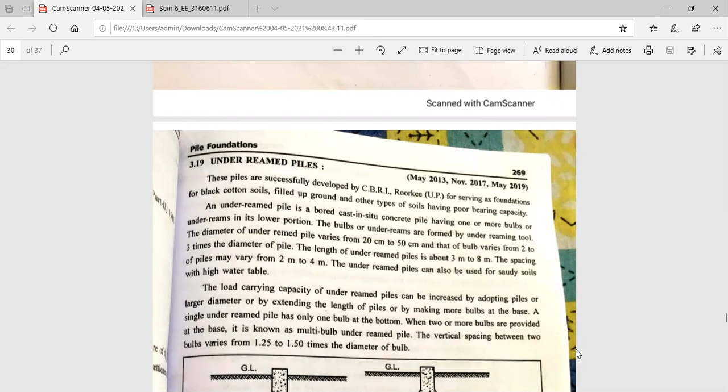Talking about under-reamed piles, these piles were successfully developed by CBRI Roorkee for serving as a foundation for black cotton soils, filled up ground, and other types of soil having poor bearing capacity.

This under-reamed pile is a bored cast-in-situ concrete pile having one or more bulbs or under-reams in its lower portion. The bulbs or under-reams are formed by an under-reaming tool.

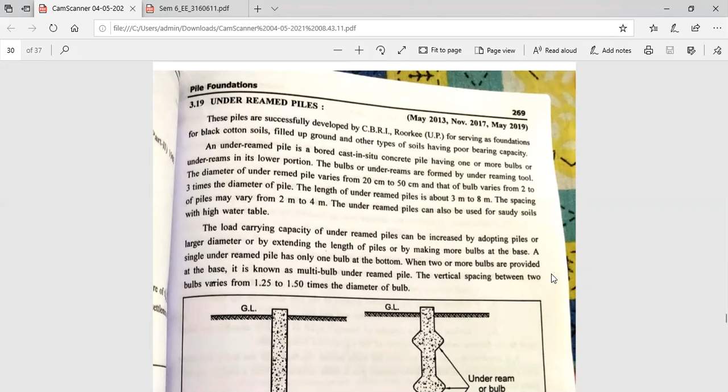The diameter of under-reamed pile varies from 20 centimeter to 50 centimeter, and the bulb varies from 2 to 3 times the diameter of the pile. The length of under-reamed pile is about 3 to 8 meter. The spacing of piles varies from 2 to 4 meter.

Under-reamed piles can also be used for sandy soils with a high water table.

The load carrying capacity of under-reamed piles can be increased by adopting piles of larger diameter, or by extending the length of piles, by making more bulbs at the base.

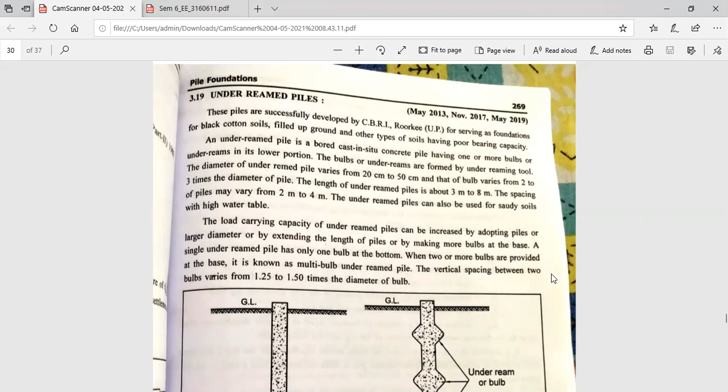A single under-reamed pile has only one bulb at the bottom. When two or more bulbs are provided at the base, it is known as a multi-bulb under-reamed pile. The vertical spacing between two bulbs varies from 1.25 to 1.50 times the diameter of the bulb.

So here the first figure is indicated as a single bulb cast-in-situ pile, and the second one is a multi-bulb type. In this case, there are more than one bulbs given, right?

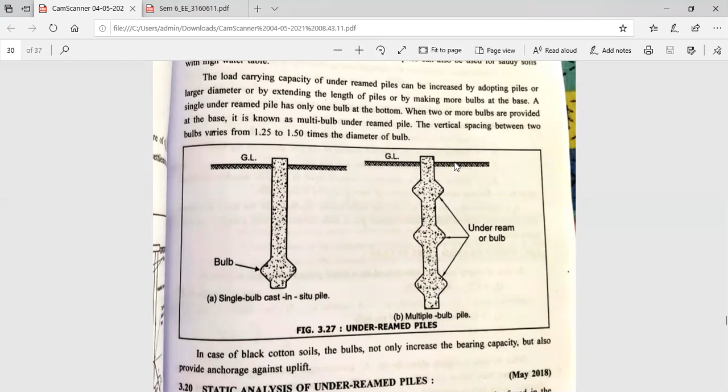It is provided below the ground level, that's why it's called under-ream or bulb. In case of black cotton soils, the bulbs not only increase the bearing capacity but also provide anchor against the uplift, right?

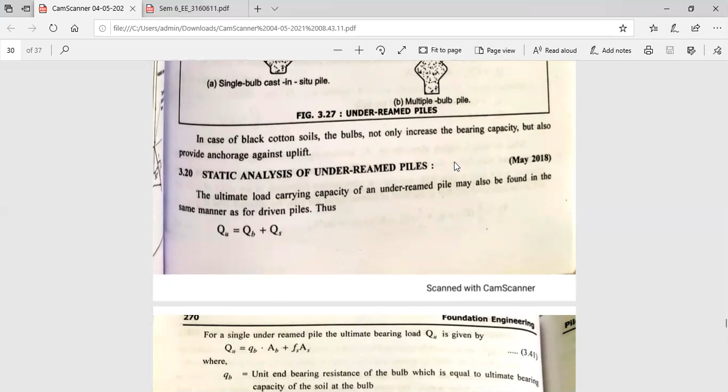So, static analysis for this under-reamed pile. The ultimate load carrying capacity of under-reamed piles may also be found in the same manner as for driven piles, which is QU equal to QB plus QS.

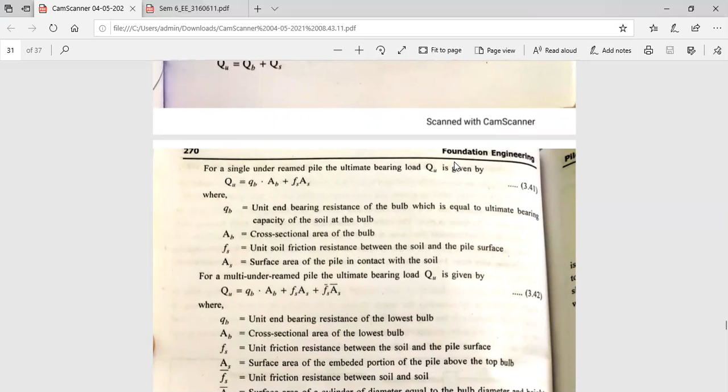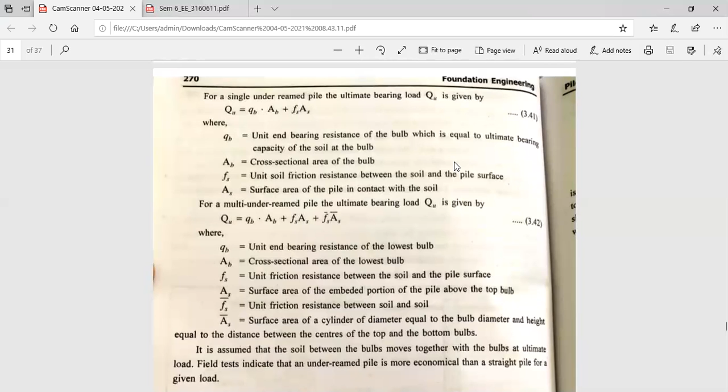So for single under-reamed piles, the ultimate bearing load QU is given by QU equal to QB into AB plus FS into AS. Small qb is equal to unit end bearing resistance of the bulb, which is equal to the ultimate bearing capacity of the soil at the bulb. AB is equal to cross-sectional area of bulb. FS is equal to unit soil friction resistance between the soil and the pile surface. AS is equal to surface area of the pile in contact with the soil.

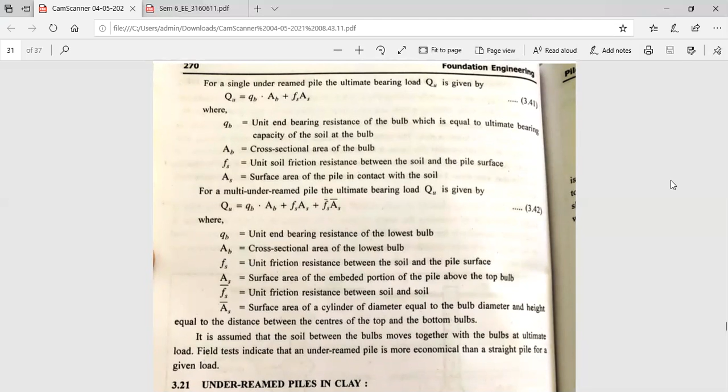And the second case is for multi under-reamed pile, for the ultimate bearing load, which is QU. So the equation is Q equal to small qb into AB plus FS AS plus FS-bar AS-bar. Here small qb is equal to unit end bearing resistance of the lowest bulb. AB is equal to cross-sectional area of the lowest bulb. FS is equal to unit friction resistance between the soil and the pile surface.

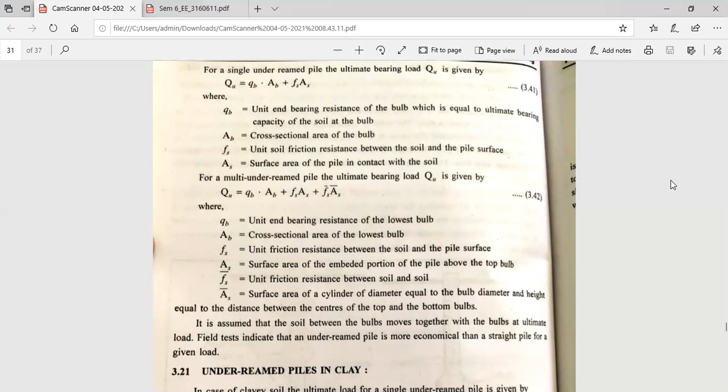AS is equal to surface area of embedded portion of the pile above the top bulb. FS-bar is equal to unit friction resistance between soil and soil. AS-bar is equal to surface area of a cylinder of diameter equal to the bulb diameter, and the height, which is equal to the distance between the center of the top and bottom bulbs.

It is assumed that the soil between the bulbs moves together with the bulb at ultimate load. Field tests indicate that the under-reamed pile is more economical than a straight pile for a given load.

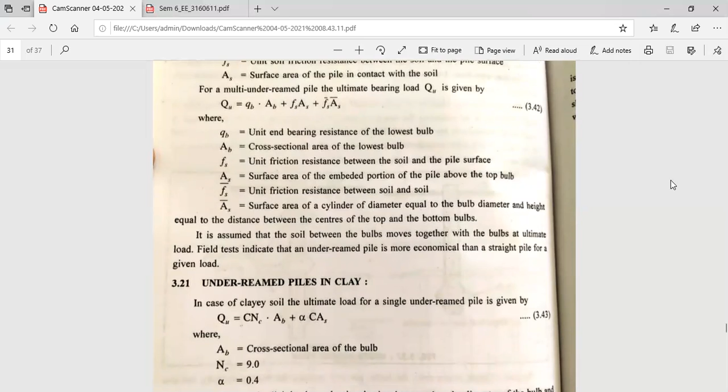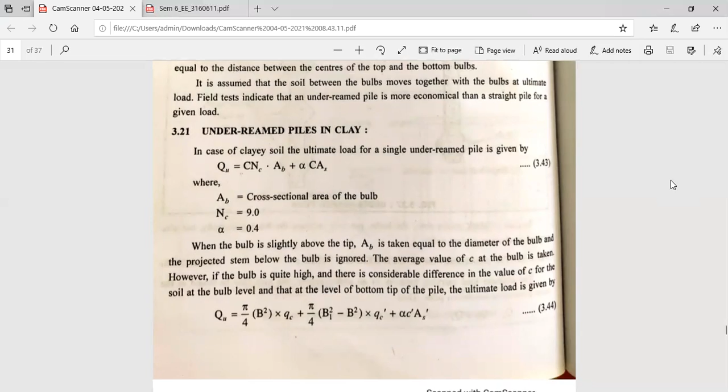Under-reamed piles in clay: in case of clay soils, the ultimate load for a single under-reamed pile is given by QU equal to C*NC*AB plus alpha*C*AS. Here AB is equal to cross-sectional area of bulb, NC is equal to 9, and alpha is equal to 0.4. When the bulb is slightly above the tip, AB is taken equal to the diameter of the bulb, and the projected stem below the bulb is ignored. So the average value of C at the bulb is taken.

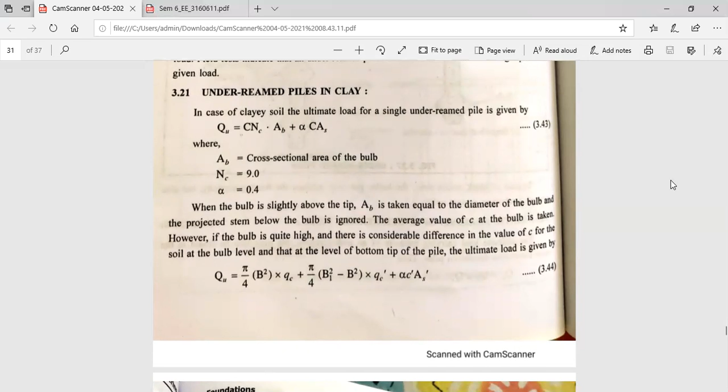However, if the bulb is quite high and there is a considerable difference in the value of C for the soil at the bulb level and at the level of the bottom tip of the pile, the ultimate load is given by Q equals pi by 4 B square QC plus pi by 4 into bracket B1 square minus B square multiplied by QC dash plus alpha C dash AS dash.

Here B is equal to diameter of the pile shaft, B1 is equal to diameter of the bulb, C is equal to cohesion at the tip of the pile, C dash is equal to cohesion at the bulb level, and AS dash is equal to effective surface area of the pile shaft.

While calculating the area AS dash, the length of the shaft equal to 2B above the bulb is totally neglected. As the pile settles, there is a possibility of formation of a small gap between the top of the bulb and the overlying soil over that length. Therefore, this length of the pile shaft is neglected. The little portion of soil where the pile shaft projects below the bulb is also neglected while computing AS dash.

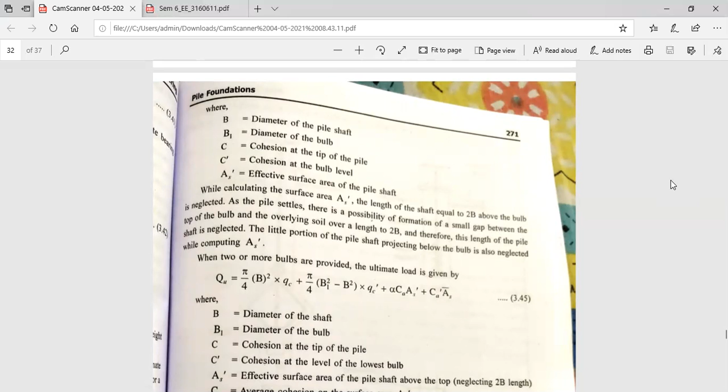When two or more bulbs are provided, the ultimate load is given by QU equals pi by 4 B square QC plus pi by 4 into B1 square minus B square multiplied by QC dash plus alpha CA AS dash plus CA dash AS bar.

Here B is equal to diameter of the shaft, B1 is equal to diameter of the bulb, C is equal to cohesion at the tip of the pile, C dash is equal to cohesion at the level of the lowest bulb, AS dash is equal to effective surface area of the pile shaft above the top, CA is equal to average cohesion on the surface area AS dash. AS bar is equal to surface area of the cylinder of diameter equal to the bulb diameter B1 and height equal to the distance between the centers of the top and bottom bulb. CA dash is equal to average cohesion on the surface area AS bar.

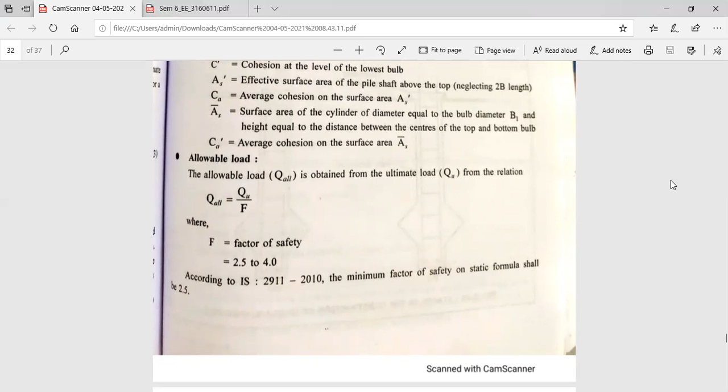Allowable load is obtained from the ultimate load. The relation between allowable load and ultimate load is Q allowable equals QU by F, where F is the factor of safety, taken between 2.5 to 4. According to the IS code, the minimum factor of safety for the static formula shall be 2.5.

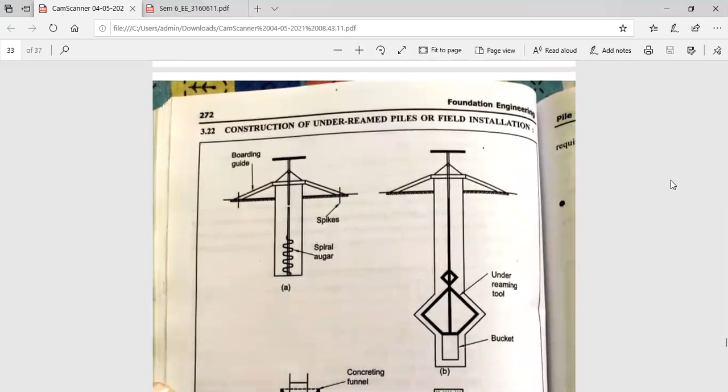Now, how is the construction of underreamed piles performed? There are various stages in the construction of underreamed piles.

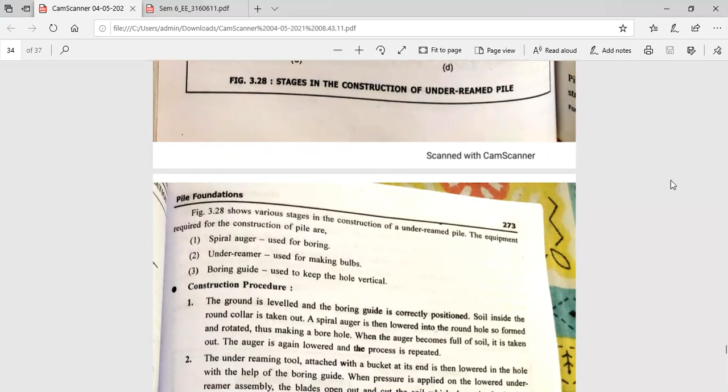The equipment required for construction of the pile are: first, a spiral auger, which is used for boring; second, an underreamer, which is used for making bulbs; and boring guides, used to keep the hole vertical. So what is the procedure to construct this pile?

First, the ground is leveled, and then the boring guide is correctly positioned. Soil inside the round collar is taken out. The spiral auger is then lowered into the round hole so formed and rotated. That's how boreholes are made.

When the auger becomes full of soil, it is taken out, lowered again, and the process is repeated. The underreaming tool, attached with a bucket at its end, is then lowered into the hole with the help of the boring guide. When pressure is applied on the lowered underreamer assembly, the blades open out and cut the soil, with the soil dropping into the bucket. When the bucket is full, a pull is applied to the handle, due to which the blades pull in, and the assembly is then taken out vertically with the full bucket.

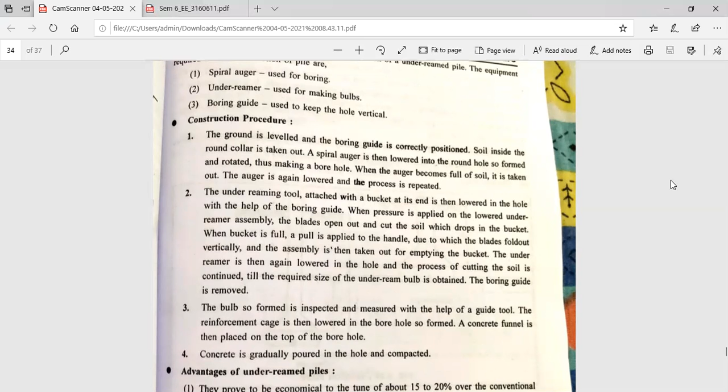The underreamer is then again lowered into the hole, and the process of cutting the soil is continued till the required size of the underream bulb is obtained. The boring guide is removed, and the bulb is formed, inspected, and measured with the help of a guiding tool.

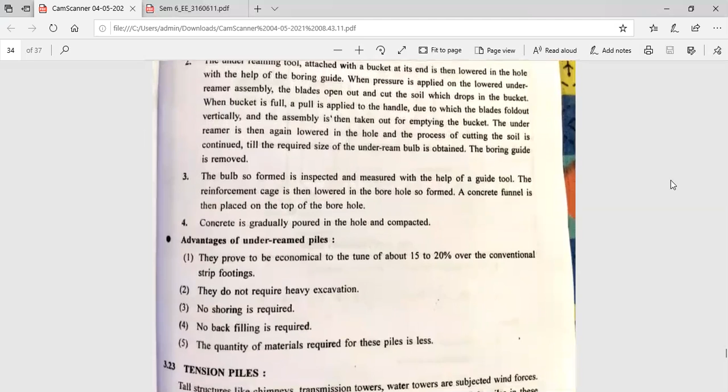The reinforcement cage is then lowered in the bore hole so formed. Concrete funnel is then placed on the top of the bore hole, and at the last, concrete is gradually poured in the hole and compacted.

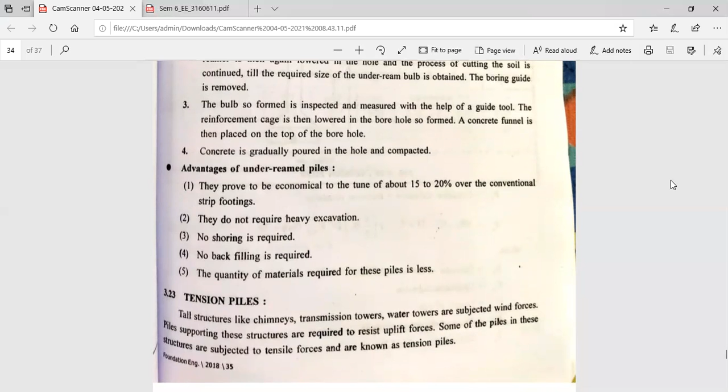The main advantages of this pile: they prove to be economical to the tune of about 15 to 20% over the conventional strip footings. They do not require heavy excavation. No shoring is required, no backfilling is required, and the quantity of material required for these piles is very less.

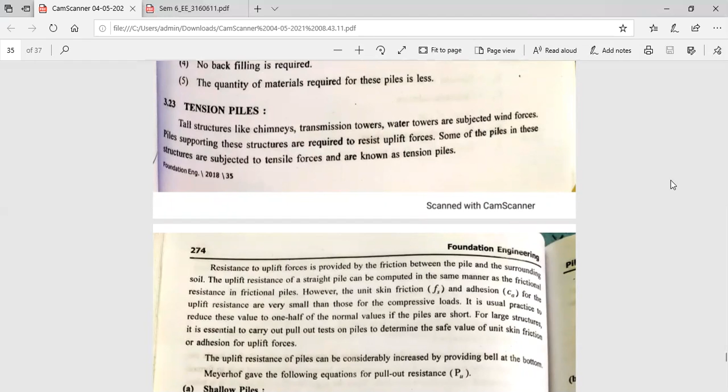Next is a tension pile. Tall structures like chimneys, transmission towers, water towers, these are all subjected to wind forces. So piles supporting these structures are required to resist this uplift force. So some of the piles in these structures are subjected to tensile forces and are known as tension piles.

Resistance to uplift forces is provided by the friction between the pile and the surrounding soil. Uplift resistance of a straight pile can be computed in the same manner as the frictional resistance in a friction pile. The unit skin friction and the adhesion for the uplift resistance are very small compared to those for compressive loads, so it is usual practice to reduce this value to half of the normal values if the piles are short. For large structures, it is essential to carry out pull-out tests on piles to determine the safe value of unit skin friction.

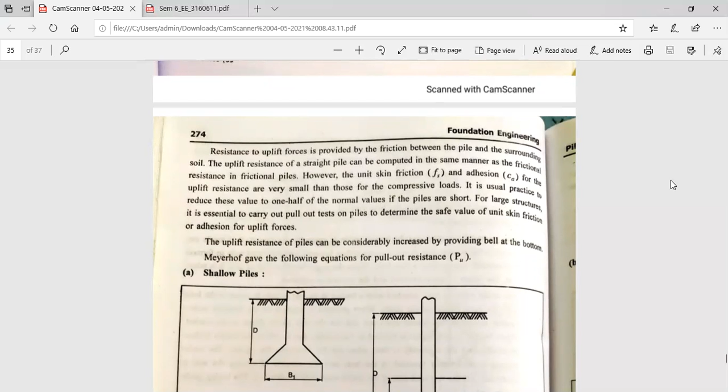Uplift resistance of a pile can be considerably increased by providing a bell at the bottom. Meyerhof gave the following equation for the pull-out resistance, which is Pu.

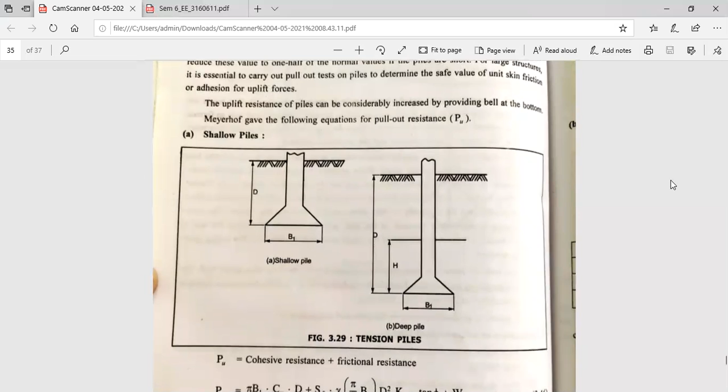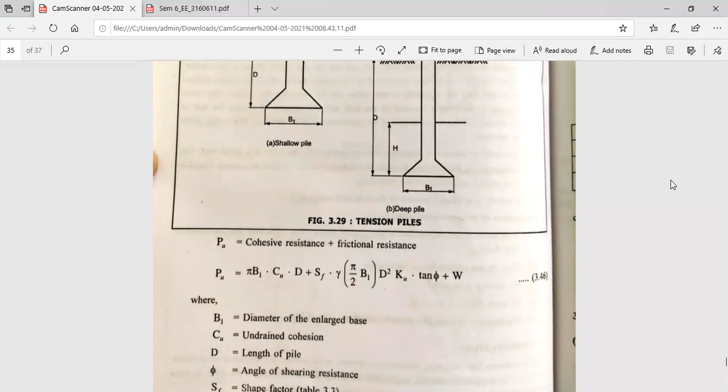First of all, for shallow piles, Pu is equal to cohesion resistance plus friction resistance. So Pu is equal to pi B1 Cu D plus SF gamma pi by 2 B1 D squared Ku tan phi plus W.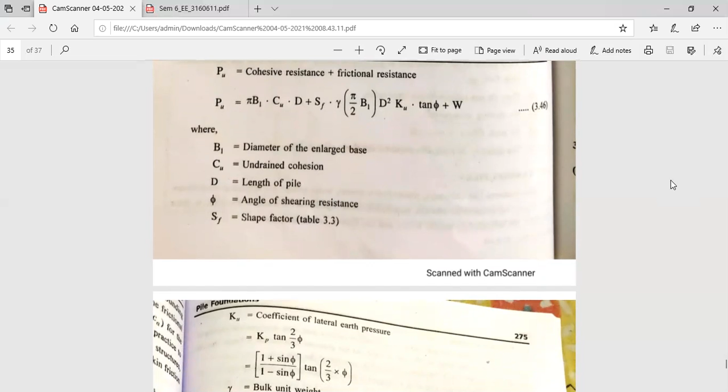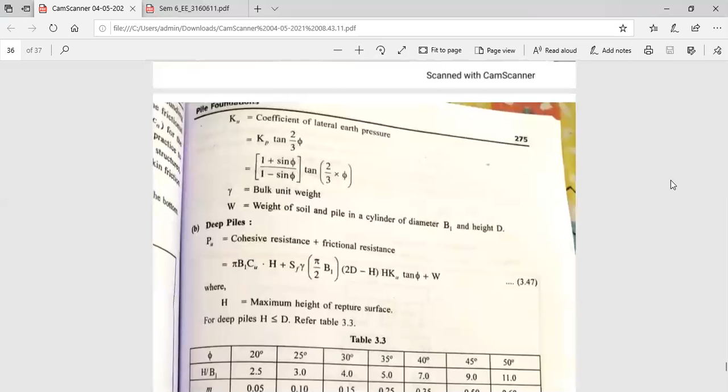Here B1 is equal to diameter of the enlarged base, Cu is equal to undrained cohesion, D is equal to length of pile, phi is equal to angle of shearing resistance, and Sf is equal to shape factor. Ku is equal to coefficient of lateral earth pressure, which is Kp tan two-thirds phi. Here Kp is equal to 1 plus sin phi divided by 1 minus sin phi, tan two-thirds phi. Gamma is equal to bulk unit weight, W is equal to weight of soil and pile in a cylinder of diameter B1 and height D.

Next is for deep piles. Pu is equal to cohesive resistance plus friction resistance. Here H is equal to the maximum height of the rupture surface. For deep piles, height which is less than or equal to depth. For this, they generally refer to table 3.3.

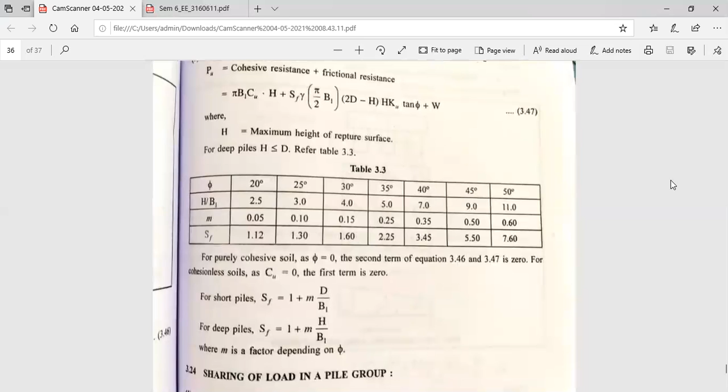For purely cohesive soil, as phi is equal to 0, the second term of equation 3.46 is 0. For cohesionless soil, Cu is equal to 0, so the first term is 0. For short piles, SF is equal to 1 plus M D by B1, and for deep piles, SF is equal to 1 plus M H by B1. Here M is a factor which basically depends on phi.

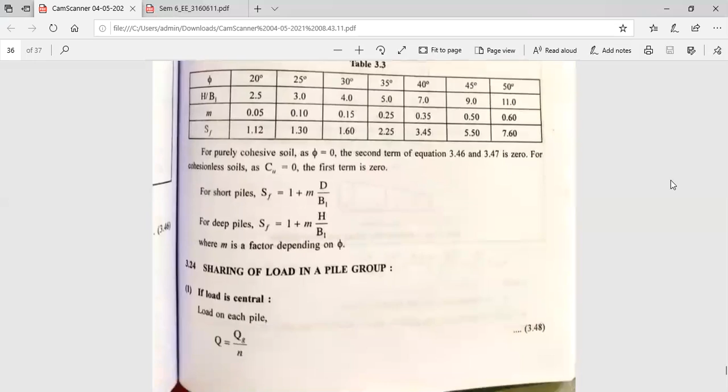Next is the sharing of load in a pile group. First, if the load is central, then the load on each pile Q is equal to Qg by N.

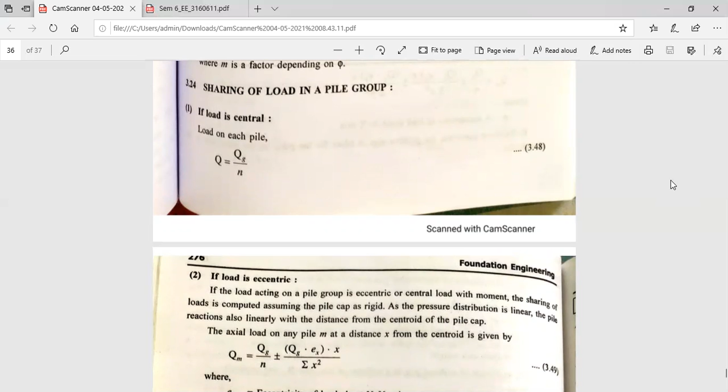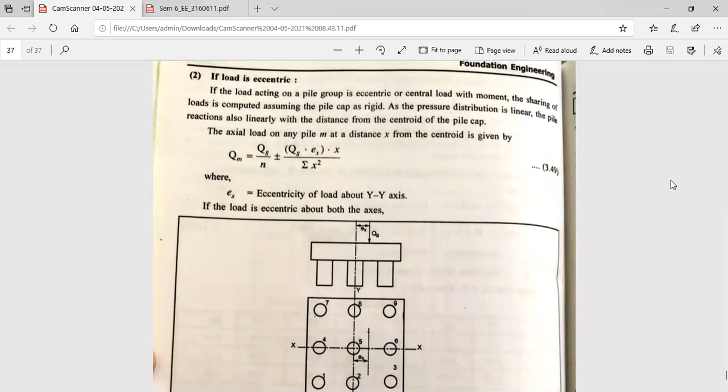Next is if the load is eccentric. If the load acting on a pile group is eccentric, or a central load with moment, the sharing of loads is computed assuming the pile cap as rigid, as the pressure distribution is linear, and the pile reactions also vary linearly with the distance from the centroid of the pile cap. So the axial load on any pile M at a distance x from the centroid is given by Qm is equal to Qg by N plus or minus Qg Ex into x divided by sigma x squared, where Ex is equal to eccentricity of load about the y axis. If the load is eccentric about both axes, the figure is like this.